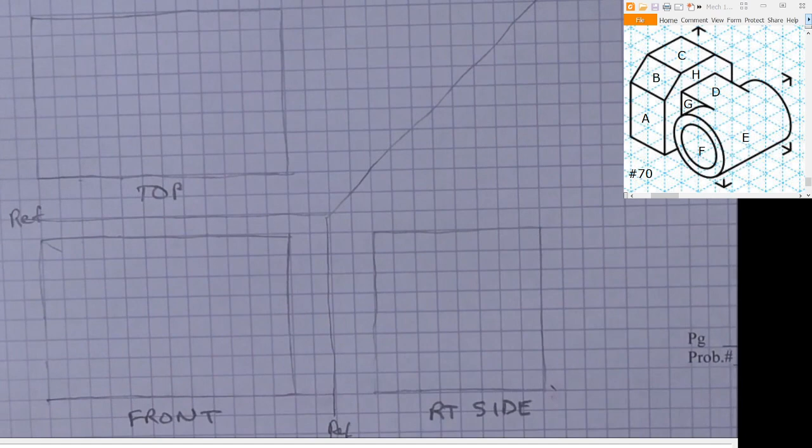As you can see, it's got a block on the left side and a cylinder on the right side, connected with a neck. Drawing a circle, that cylinder is 3 squares high, 3 centimeters high. So we're going to double that, so it's going to be 6 diameter, and it comes right to this edge.

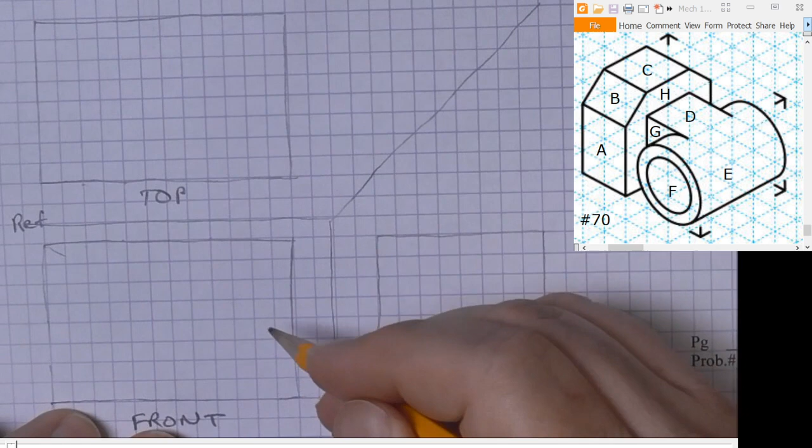Now those little arrows on the screen, that's what we call the packing box. The packing box is the size of the box needed to just barely, perfectly fit that part. It looks like chicken feet or something, those little corners, those little arrows, okay?

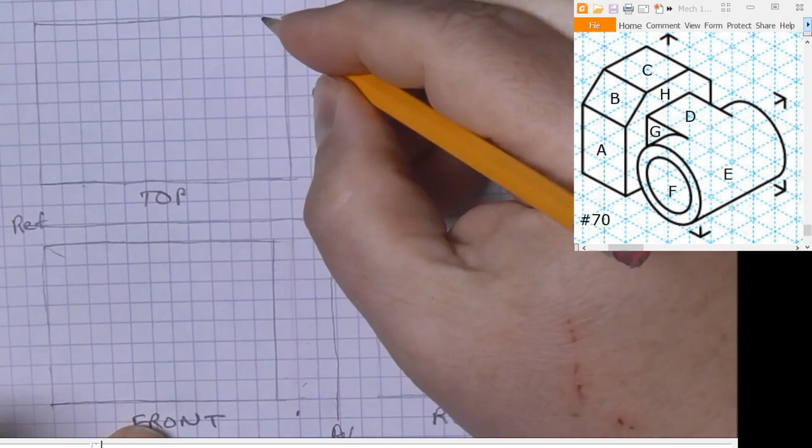They're trying to show you where the corners of the box are. Now if you notice carefully, this part is not quite 6 units wide from back left to front right. That little chicken foot there, that little corner, is actually 5.5 units wide. So 5.5 doubled is 11. So this part is actually only 11 squares wide. So check those carefully. A lot of times the book shows them at like 6 by 4 by 4, we double it to 8 by 8 by 12, but sometimes they're not exactly, so read it carefully.

Okay, so we're gonna do 3 diameter, we'll call it 6. So 1, 2, 3 radius, 1, 2, 3. Here is the center. Find the center, find the north, south, east, and west points, and then draw a circle.

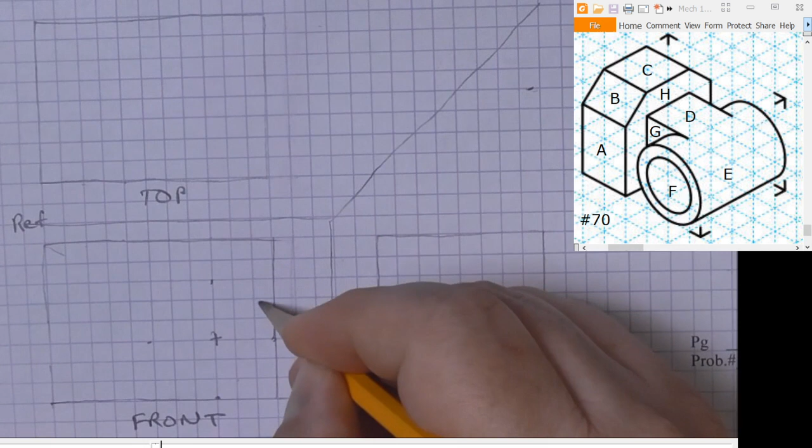Might take you a few times to get it fairly round. The first time might be elliptical or egg-shaped. There you go, that's pretty good. Once you get the construction line where you want it and it's round, then draw it nice and dark. That's how you do a circle.

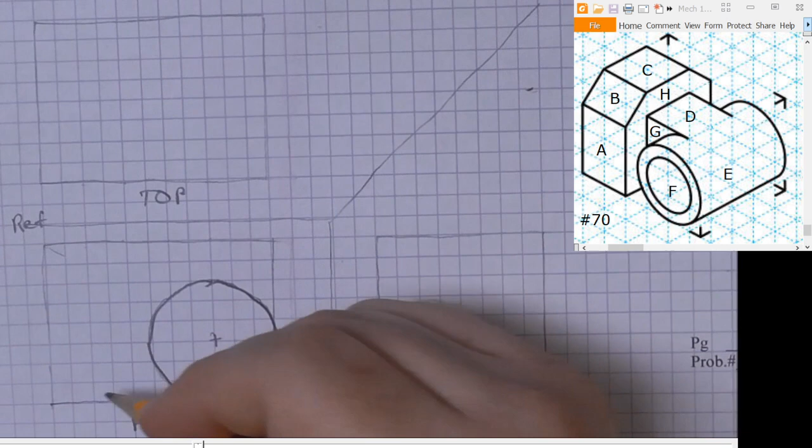Now the left side of the part is a block that's 2 squares wide, so we're going to double it to 4. So it goes, and this is our front view we're drawing, of course. This thing is 4 units doubled to 8 high, so it's like this.

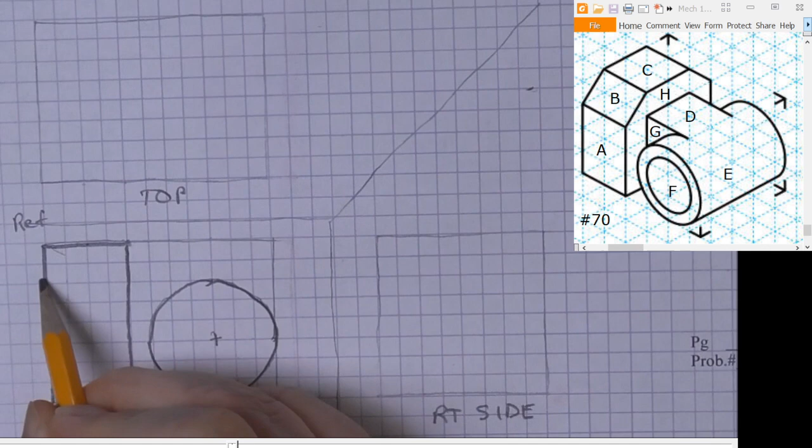And the front plane is 6 units high. 1, 2, 3, 4, 5, 6. We'll call that A. Well, I'll have to number these, they'll be numbered by the time you get it on the screen. This is B.

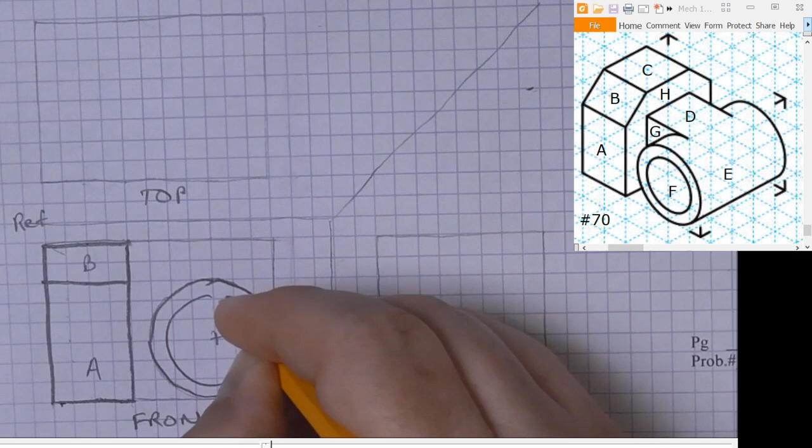Let's see, the wall thickness here is less than 1 unit, so we'll just approximate it like this. And the neck that connects them goes over to here. We don't really know where it is down below. It either goes across there, I suppose it could go across here, but I'm just going to assume it goes across here. However you assume and draw it, make sure every view shows you the same thing.

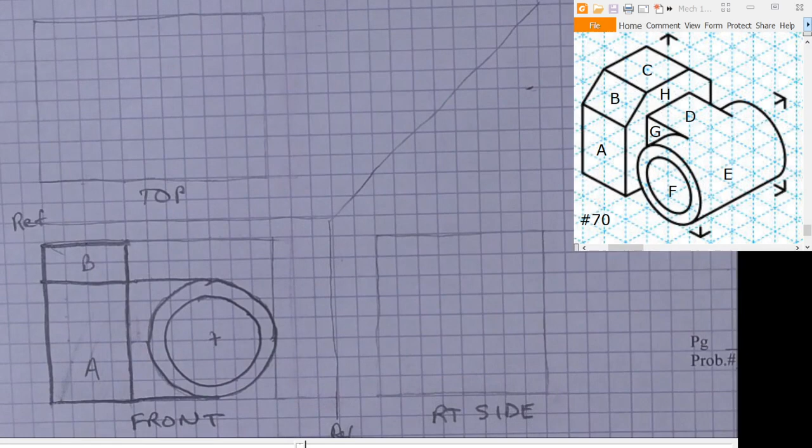Okay, so this is a center line going through here and through here. The center line is a little bit longer than the actual curved surface, it goes a little bit to the outside of it. So that is the front view.

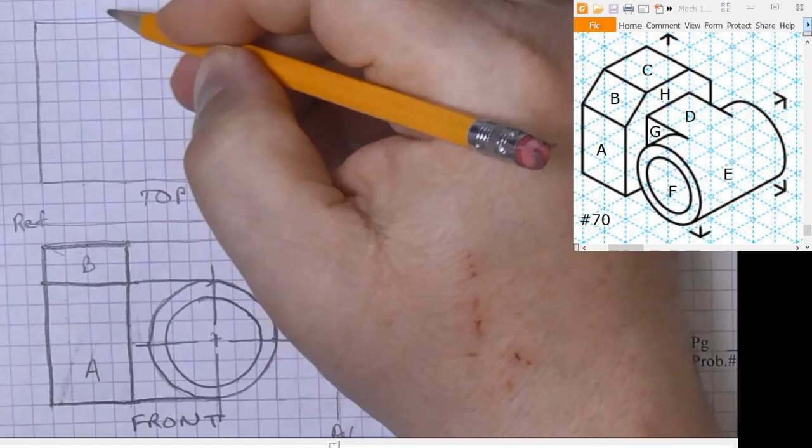The right side, let's do the top view. Top view is easier. So we're going to have like a rectangle here, projecting up from here. We'll go through this part a little faster than the other ones, we're getting better at it. Okay, so this is A.

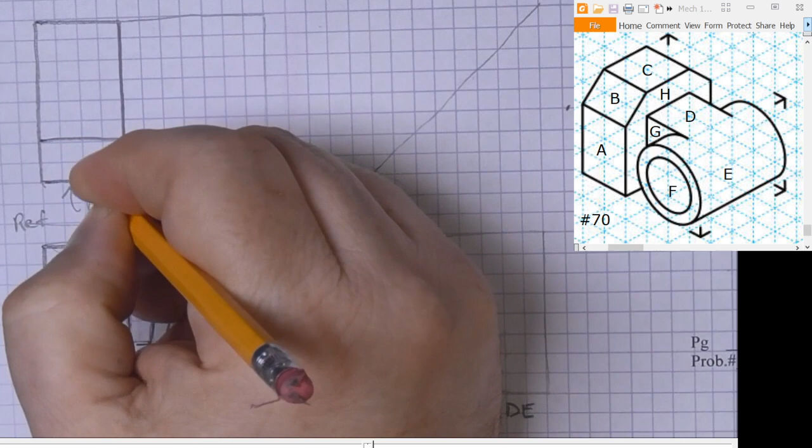B is on an inclined plane here. This is C, and we have a back, well I guess we could call that back plane B prime. It's like a reversed image.

Now the neck is only 2 squares deep, we'll double it to 4, so it's coming out here somewhere. We're going to project the sides of the cylinder up right there, project this side up. Center line down the middle.

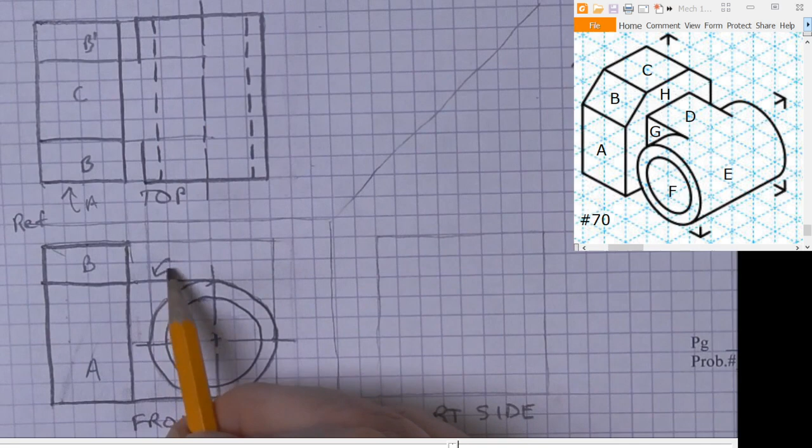Hidden lines of this inner hole, project them up. This neck, this surface up here, we'll call it D. This is C. So it goes over, and there's no line across here because this surface D is tangent at the center line portion of the top of the cylinder.

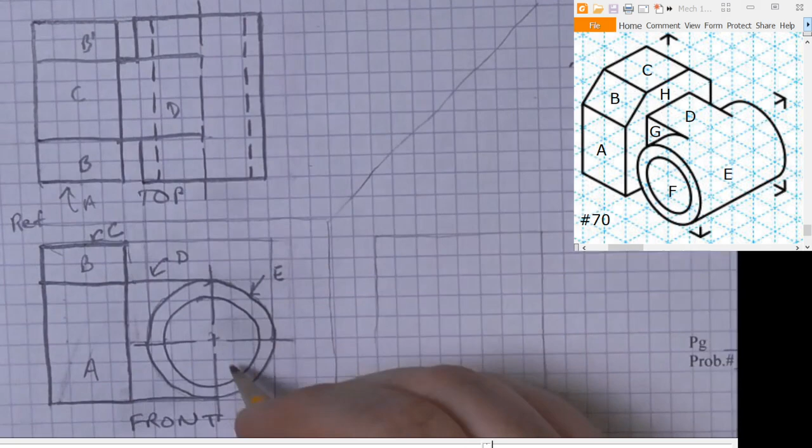How you name this is anybody's guess. E would be maybe the outside surface, and F would be the inside surface. And here's G, so this right here is G, and this outside surface is E, and the inside surface, which is basically where the hidden lines are, this is F on the inside. I guess we could just call that E here.

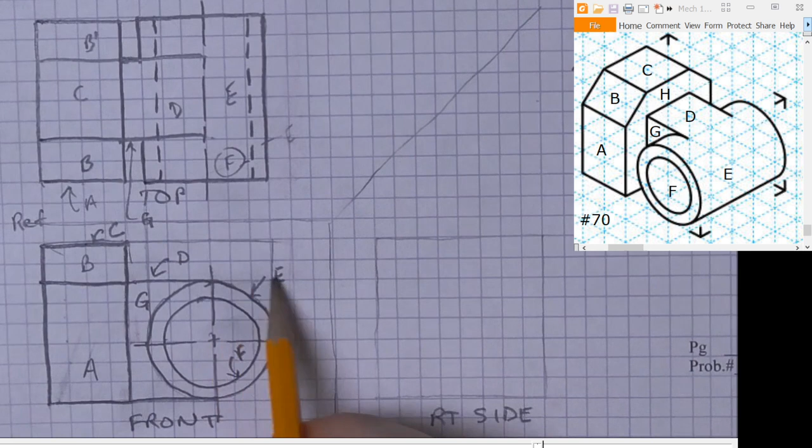Okay, now looking at it from the right side. From the right side, this cylinder looks like a rectangle, we can project it over. Here's the top of it, and we're seeing a big curved surface as an orthographic view, and it just looks like a rectangle with a center line down the center, and the hidden lines should be thinner than your object lines.

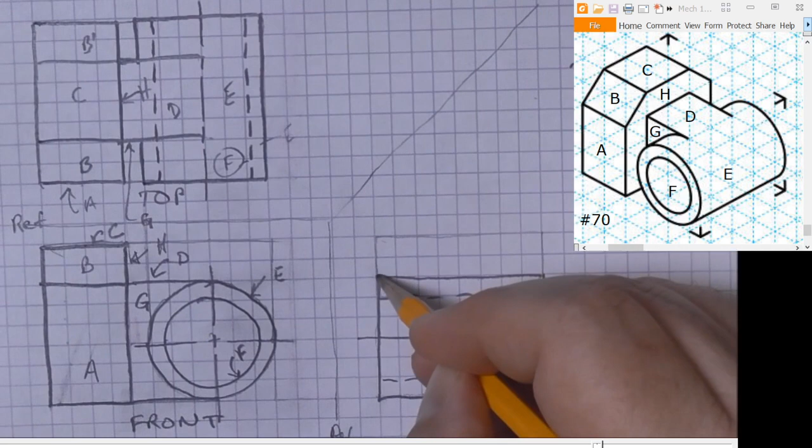And then the top part, let's see, this plane here we didn't label yet, we'll call that H. That's this here, so it goes at an angle over and down again. So this is B, that B prime, this is C up top. A is in the back, and it's on the same plane as the face of this cylinder, okay?

So they're all that line. This is actually the cylinder, the face of the cylinder, and this A here on the same plane is in the back of that. Okay, this neck here has sides, so G is right here. That is G. This is H.

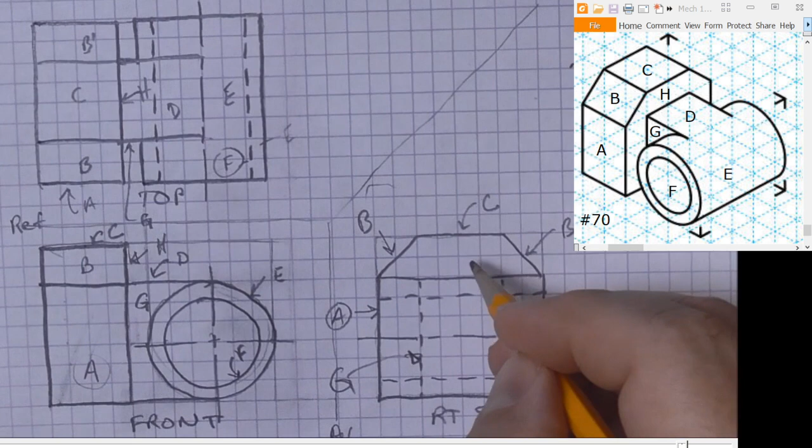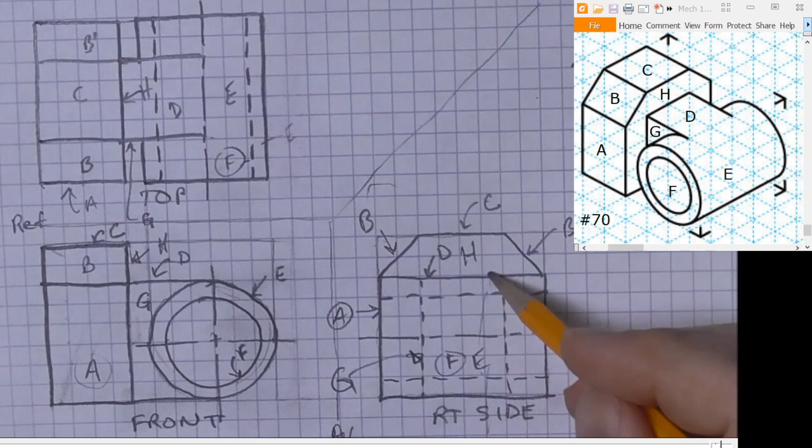Did we get them all now? A, B, C. D is the top surface. E is this outside surface. F is the inside surface. So E is all of this from top to bottom. F, G, H. Got them all. That's it.